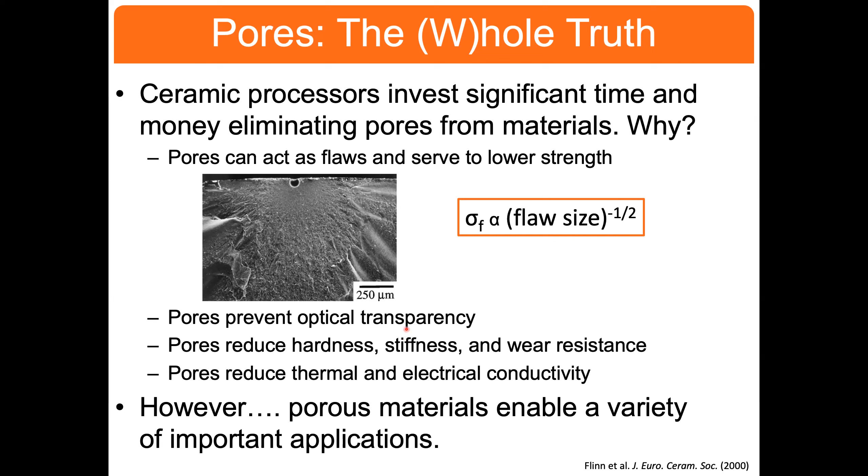However, as the field has advanced, we know that porous materials really enable a broad array of applications. To give you a sense of that, porous solids are absolutely essential in things like fuel cells and batteries, in catalyst supports—your catalytic converter, which seems to be a hot commodity these days, is made in a way where you have these flow-through channels, and those support the catalysts that are needed for keeping some of the nasty substances out of the environment. They can be used for bone scaffolds and microfiltration, and of course in thermal management, where that low thermal conductivity is then used to an advantage.

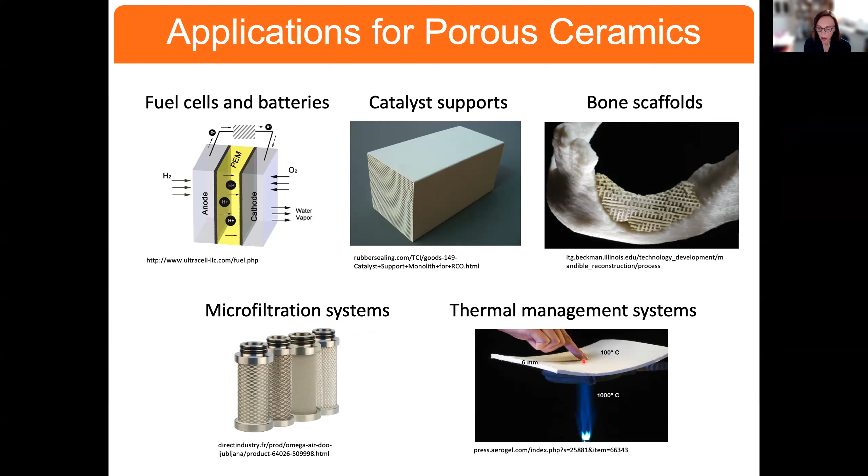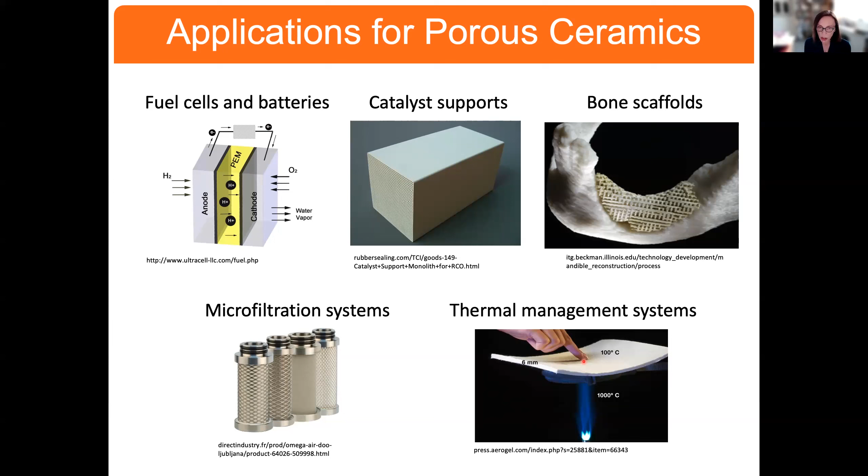So with that in mind, we need some sort of way to describe these pore networks, because as you saw in this previous slide, these pore arrays can have a variety of shapes and sizes. It's not just how much porosity is there, shown here in terms of fraction, but we also need to think about pores in terms of their size distribution, their surface area, their tortuosity in a specific application in which the pore pathway can be quite rough.

In fact, we can get a measure of that: the degree of order in the pores. You saw in the catalytic converter that the pores are highly ordered, whereas in an application for bone scaffolds, they needn't be as well ordered. We're also interested in connectivity of the materials, which you see here in this three-dimensional image, where the green shows continuous porosity.

So all of this then comes into play in terms of how we process these materials, and that will be a lot of the focus of my presentation today.

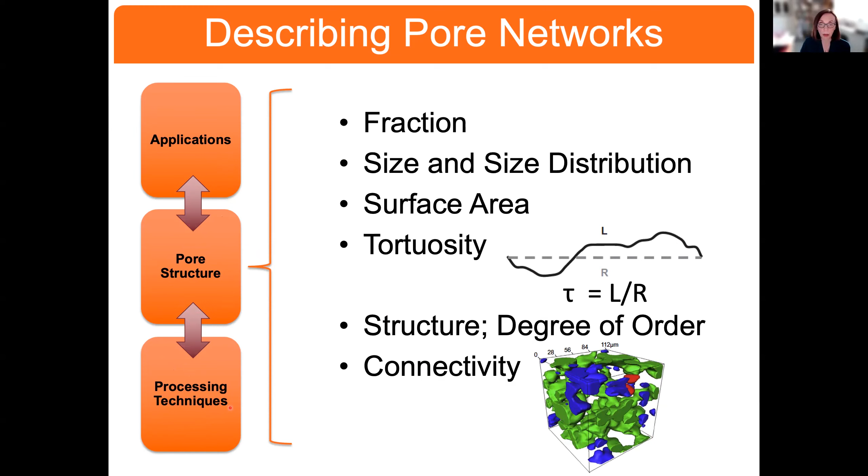Just to give you a sense of some of the things I've worked on, it turns out I've worked on a variety of porous solids. Some have to do with wood-derived materials where we can convert them to silicon carbide or carbon, and we end up with microstructures that look like this. They're known as biomorphic solids because we replicate what might be seen in a wood-based material.

Working with some industrial partners, we've looked at acicular mullite, and you see these beautiful needle-like structures that can be produced to look almost like pickup sticks. And of course, with the advent of additive manufacturing, we can also create porous structures as seen here in a very ordered array.

My focus today is going to be on these materials shown here in the bottom center. These are known as freeze cast solids, produced by forming a template and then removing the template. This specific one is produced to form a silicon oxycarbide.

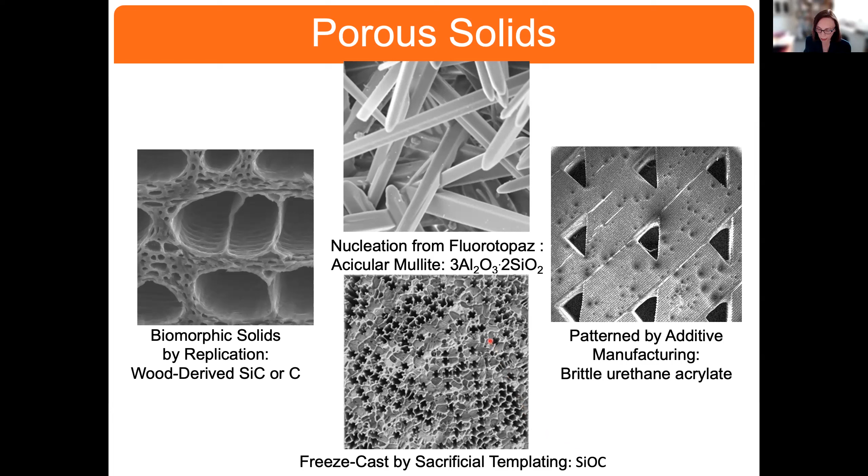So the two themes I want to focus on today are, first, how can pore networks be tuned to control flow and filtration in the body? And secondly, how can pore networks be tuned to favor deformation of a material over fracture?

So let's start. This tunability, as I mentioned, is a critical feature. The process we have used is known as freeze casting, and we're relying a lot upon an understanding of the solidification process.

I have to admit that in the ceramic community, we don't think a lot about solidification, in part because many of these materials are so high in terms of their melting points that we try to make them without going through a melting and solidification process. Instead, we do a lot of solid state processing. But in this particular case, we had to learn about solidification.

What I show here in this pressure temperature diagram is really a map which describes the solidification process. So we can do this in one of two ways.

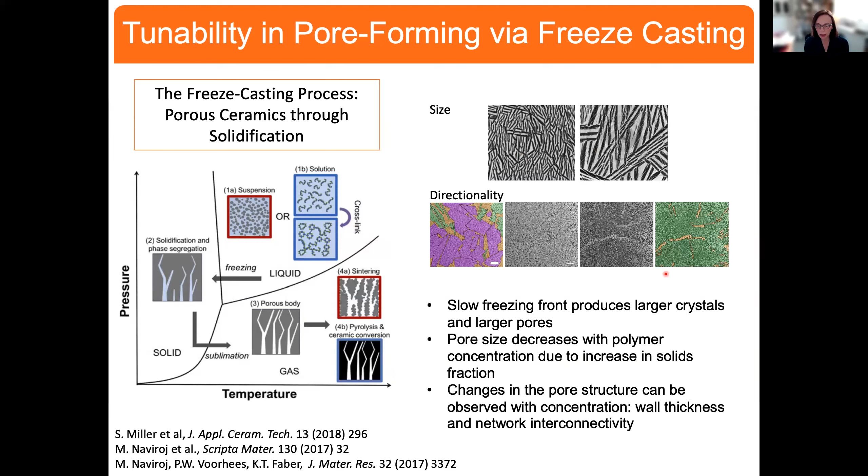Okay, so let's now go a step further. What else can we control? At the start, I mentioned all the things we wanted to control - not just size and fraction, but connectivity, etc. So to think about that, first I want to tell you a little bit about this.

Pre-ceramic polymer system that we use. Paolo Colombo has done extensive work on pre-ceramic polymers, and he and a couple of colleagues wrote a very beautiful paper that describes a great deal of work on these pre-ceramic polymers.

This figure in the middle demonstrates the various pre-ceramic polymers, ranging from polysiloxanes to polycarbosilanes, that allow you to make a lot of silicon-based ceramics - ranging from ceramics that include silicon, aluminum, and boron, just by virtue of the pre-ceramic polymer used. We focus our work on the polysiloxane, because when the pre-ceramic polymer converts to a ceramic, there's a pretty high yield, which is to our benefit, okay?

So this scheme enables a wide variety of techniques and materials. I mentioned that these are cross-linked - that step occurs in the solution step, and you can do that either using temperature or via a catalyst, as we often do.

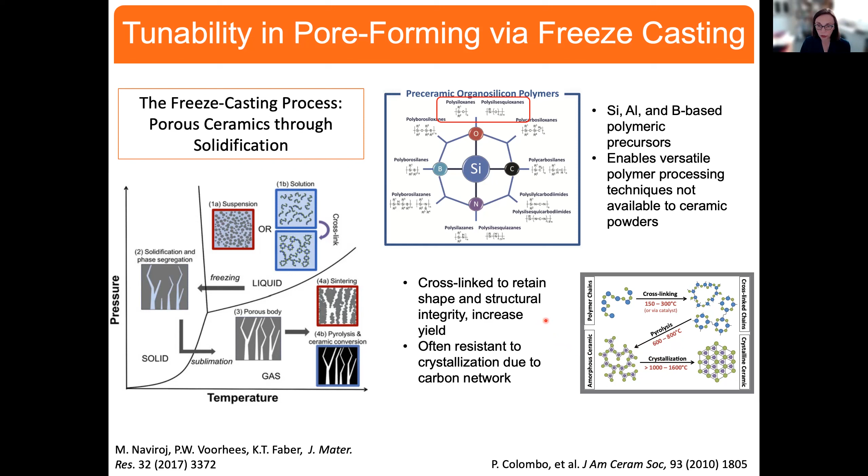Okay, so let's now think about the tools we have in hand to give us a greater sense of tunability. What I'm going to focus on in terms of these tunability methods is, first of all, the choice of solvent that we use for this solution step.

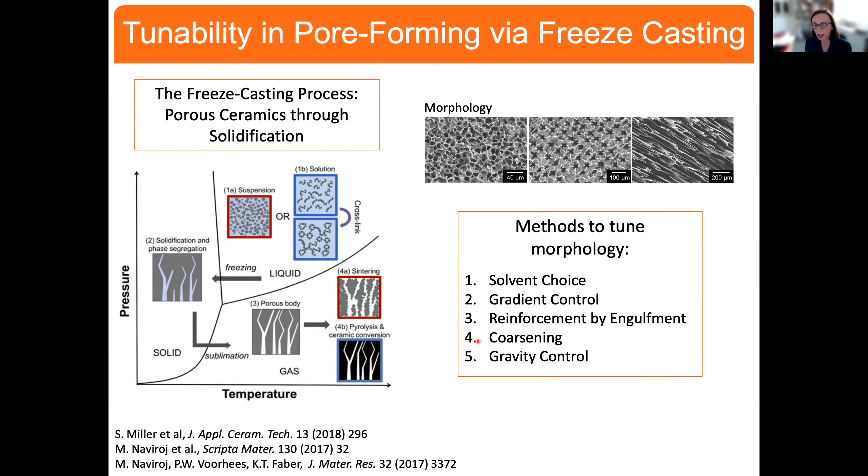I'm also going to show you that we can control the temperature gradient in the freezing process. The other method I'll focus on today is coarsening the structure, and in doing so, changing the morphology. I don't have time to talk about all five here, but we'll pay attention to 1, 2, and 4.

One of the things to think about in terms of the freezing process itself has to do with how fast a freezing front is moving through the solid, and also the temperature gradient we have imposed. What is the temperature of that cold plate versus that at the top of the solid?

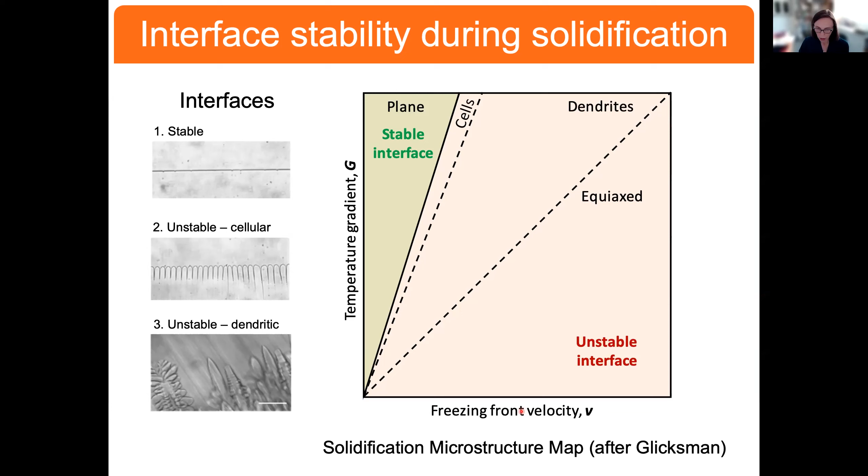So basically, if we can follow this map, if we have control over freezing front velocity and temperature gradient, we can move microstructurally through this map. If you go too far, you just get an equiaxed structure. So that's one important feature of all of this, that these parameters are at your disposal to control the shapes, the morphology of these pores.

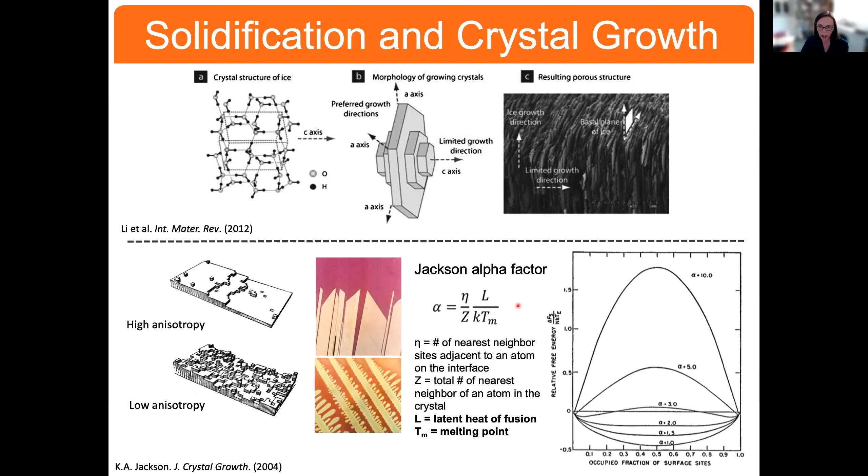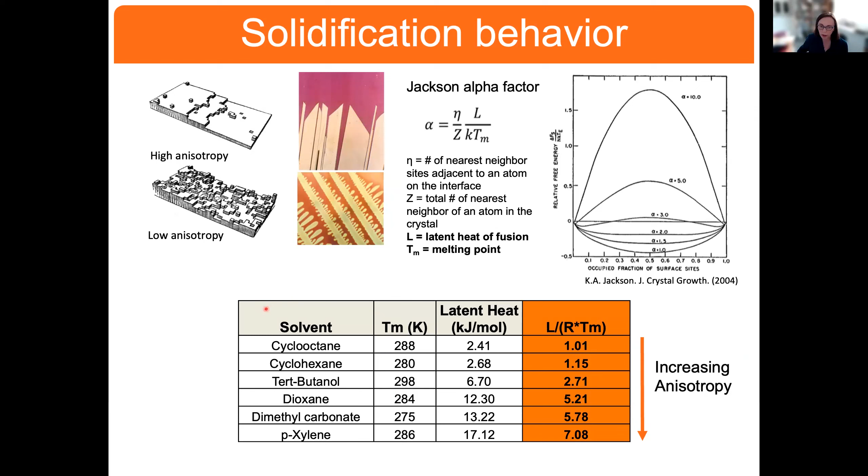So what we should expect to see is increasing anisotropy. Keep in mind, we're starting with the same pre-ceramic polymer, our polysiloxanes, so in the end we'll get silicon oxycarbide, but made with these very different solvents. So what one sees now is this range of pore morphology going from left to right.

Cyclooctane was basically the solvent that should show the least anisotropy, and in fact it does. These micrographs are a view looking top down - we've made a cut in the material and we're looking at the solid in cross-section. The bottom set of micrographs show the view if we cut along the length of the material. With cyclooctane, the microstructure looks like a sponge - it doesn't matter which direction you are casting in.

It is completely isotropic. But as we move through this increasing Jackson alpha factor, we begin to see a great deal of difference in morphology. For example, with cyclohexane, looking down from the top, the dark areas are the pores, and they almost look like crosses. In the longitudinal view, we see these dendritic pores have long channels - what you're seeing are the negative of the side arms of the dendrite. So all of these pores are outgrowths from the main channel of the dendrite, and they're negative.

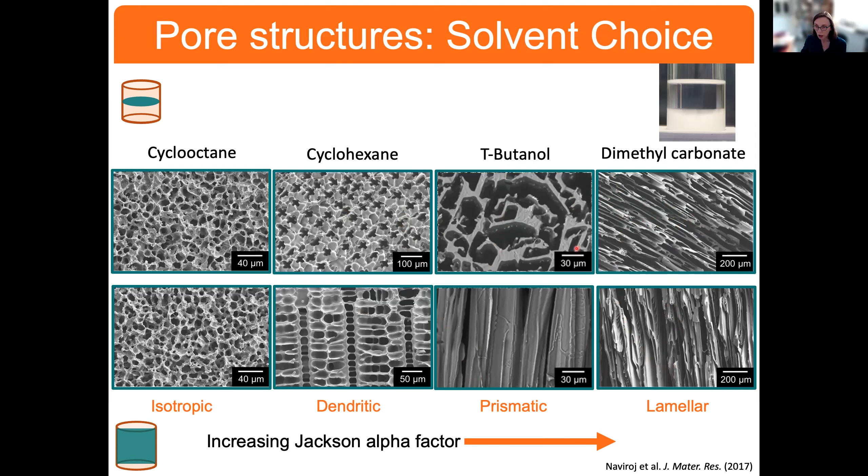Although I've been warned by metallurgists who think about solidification much more carefully than I that this Jackson alpha factor is not as accurate as they would like, it certainly has given us clues in terms of the anisotropy, or lack thereof, in these freeze cast solids.

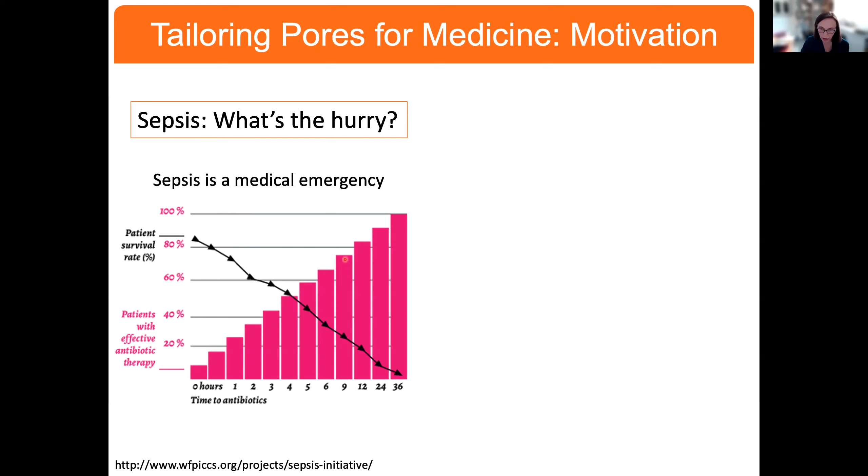But the problem is, in terms of how sepsis is analyzed, it often takes a blood culture to do that, and that blood culture can take more than 18 hours to grow and assess. So time, as you see here on the left, is of the essence. If you have to wait for a culture, normally you are treated with multiple antibiotics because they don't know what bacteria they're looking for. But it would be much more effective to be able to define which bacteria it is and treat that specifically.

Now the other challenge is that if you were to look in the bloodstream, the bacteria that could cause this illness is there at very small amounts. This is actually a zeptomolar concentration compared to what we see in the bloodstream.

Red blood cells, 5 billion per milliliter. White blood cells, 7 million per milliliter. Platelets, 200 million. So these are very small in contrast, and what one would like to do is not only separate the bacteria, but separate them in a way where we can have a large enough concentration that they can be analyzed easily.

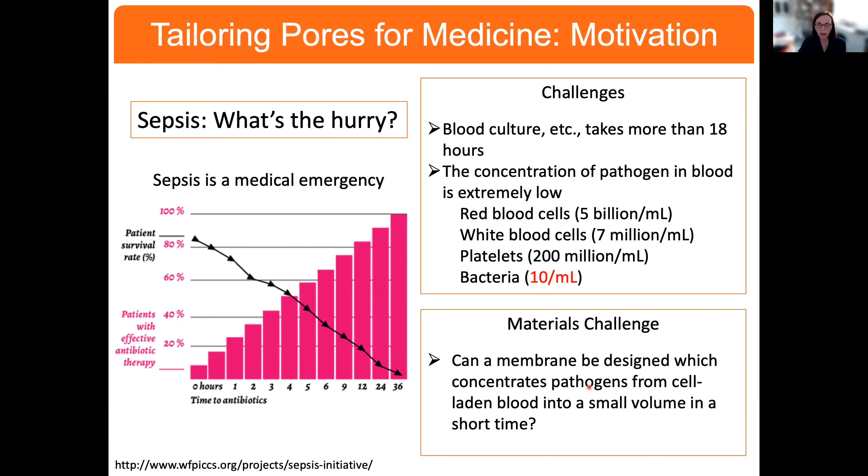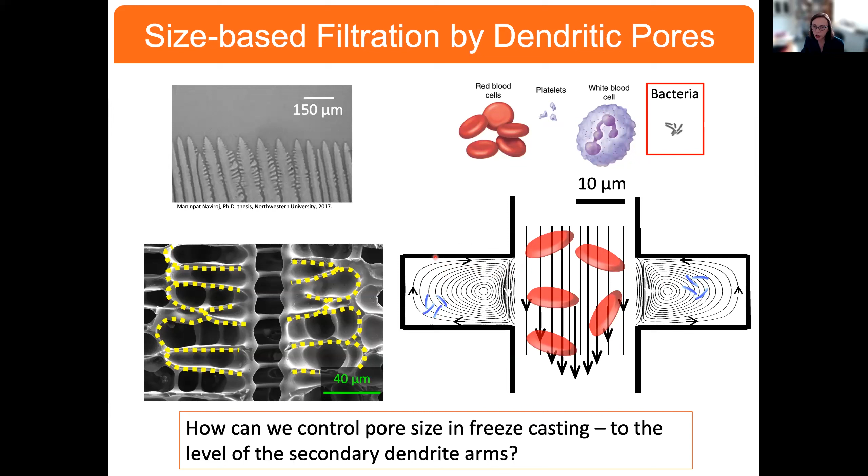So in terms of dendrites, this is the primary channel of the dendrite, and these are the secondary arms. As you might expect, in terms of tuning this whole process to produce a structure that we would want, we might want to change the length, or we might want to change the fraction of these arms.

And to do that, we go back to our stability microstructure map that I showed you earlier, to think about how we need to be in a regime where we have dendritic structures, and what comes into play.

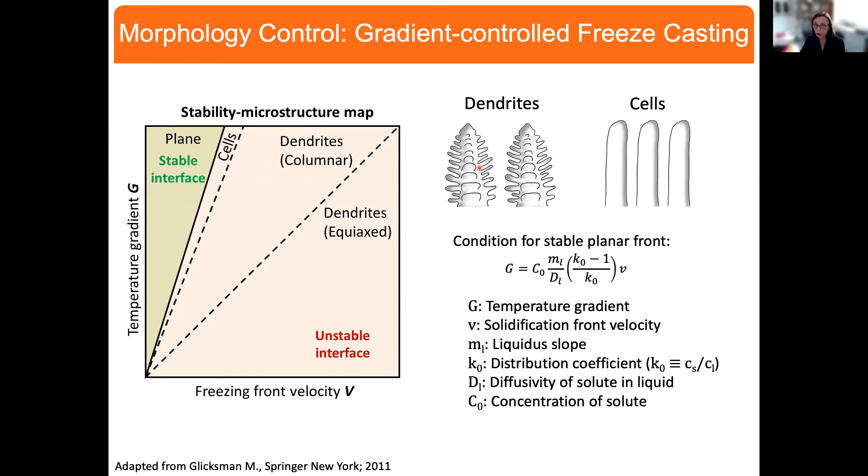I show here an equation that defines the condition for a stable planar front, over here. I do this to give you a sense, from a solidification standpoint, of what's going to play a role. Certainly the temperature gradient, that temperature difference between the cold plate and the exterior. How fast things move, we see the velocity plays a role here, the freezing front velocity. But then there are other features, in terms of the diffusivity of the solute in the liquid, the concentration of the solute, that also plays a role in the system, and that would allow you to move from this stable interface to a cellular interface to a dendritic interface.

So if we need to control both freezing front velocity and temperature gradient, one way to do this is not to just have a cold plate. This is an actual photograph of our freeze casting setup. So here's our cold plate on the bottom, here's the mold.

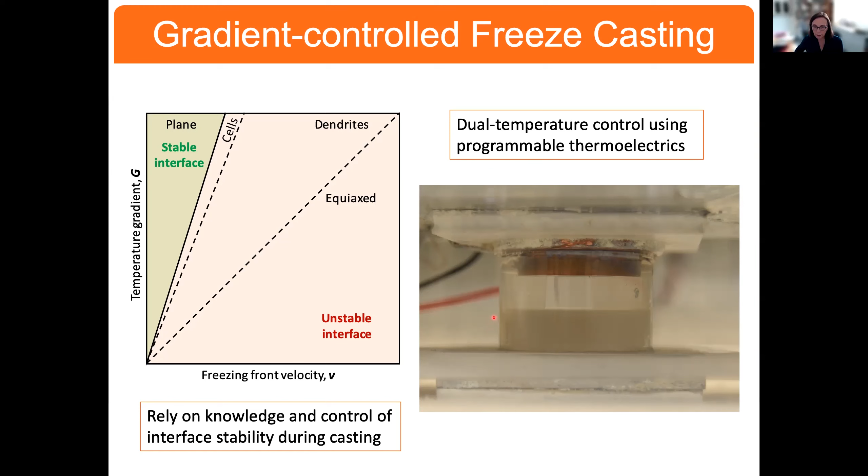But we also put a second thermoelectric here on the top. And that allows us to have dual temperature control, in which we can program to keep both the temperature gradient and also the freezing front velocity constant. It also gives us an opportunity to move around this region.

So again, what I've shown over here is this stability microstructure map, and I've put in a few points here. We can do some experiments where we can keep the freezing front velocity constant and change the temperature gradient, or keep the temperature gradient constant and alter the freezing front velocity.

And I want to show you both with scanning electron microscopy, but also with mercury intrusion porosimetry, which gives us a sense of the pore size distribution, where we're infiltrating mercury into the solid, and the pressure that we need to push this into the solid is going to depend upon the size of the pores. So if we know that pressure variation during the experiment, we can get the whole pore size distribution.

So the experiments that I'm going to talk about use cyclohexane as the solvent. And as I said, we use polysiloxane, in this case polymethylsiloxane, as our pre-ceramic polymer. After it is pyrolyzed, we are left with silicon oxycarbide. And we looked at this with a few different concentrations.

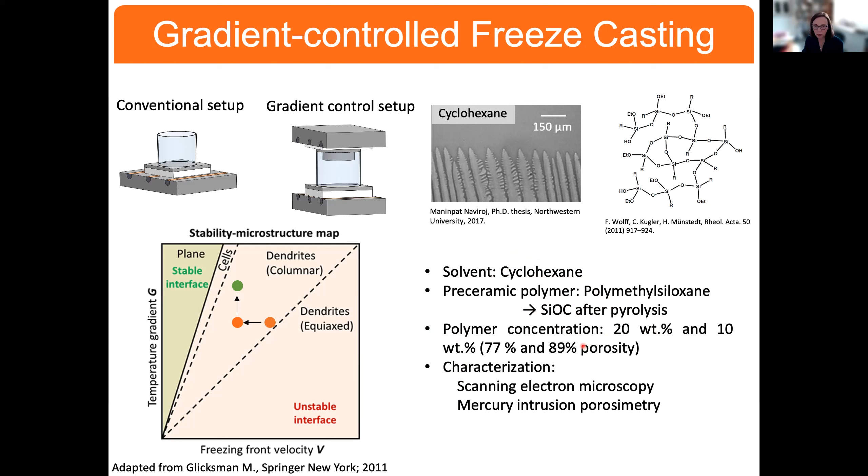Okay, so this is what we're doing. Here's our microstructure map again that shows us that if we start here and increase the temperature gradient, one of the things you see is that we have much smaller dendrite spacing. They're much closer together, so these are moving toward cellular-like pores.

If we start over here at a high freezing front velocity and decrease it, we end up, as shown earlier, with much larger pore diameters. Okay, so these are the knobs that we have to turn.

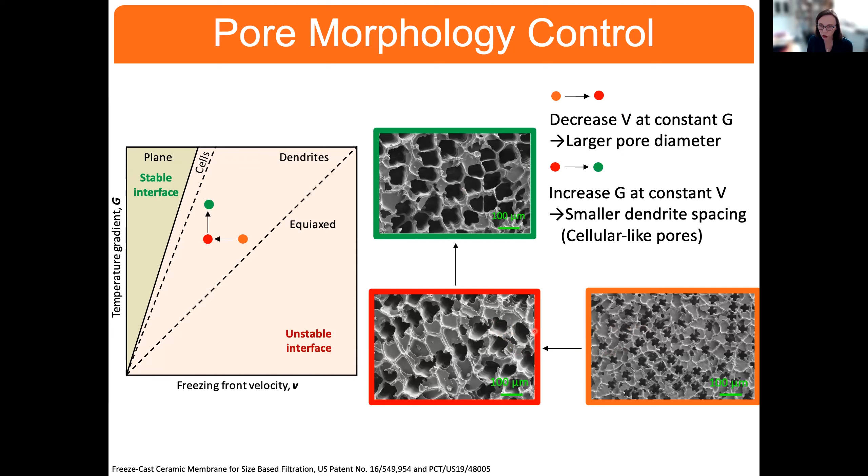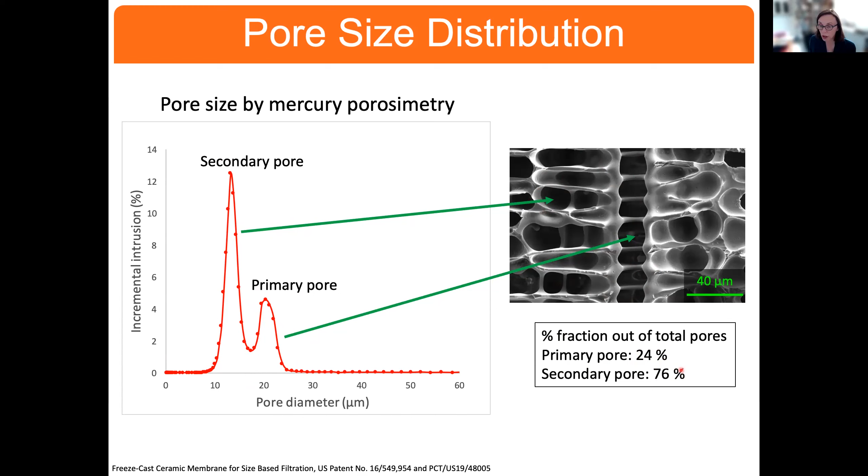And this is what one would typically see from an analysis by mercury porosimetry, in which we are plotting the percent intrusion of the mercury for a given pore diameter. We see here that at the larger scale, these are the primary pores, those primary channels, and these are the secondary pores, these side channels. You see from a fraction of pores that the secondary pores take up much more space in the material - it's 76% of the pores are the side arms, where 24% are the main channels.

And so this is an example now. If we then change the freezing front velocity, as we go to slower velocities, we're basically pushing that pore size distribution to the right to move that to much larger pores. And that's shown here in the longitudinal direction and in the transverse direction.

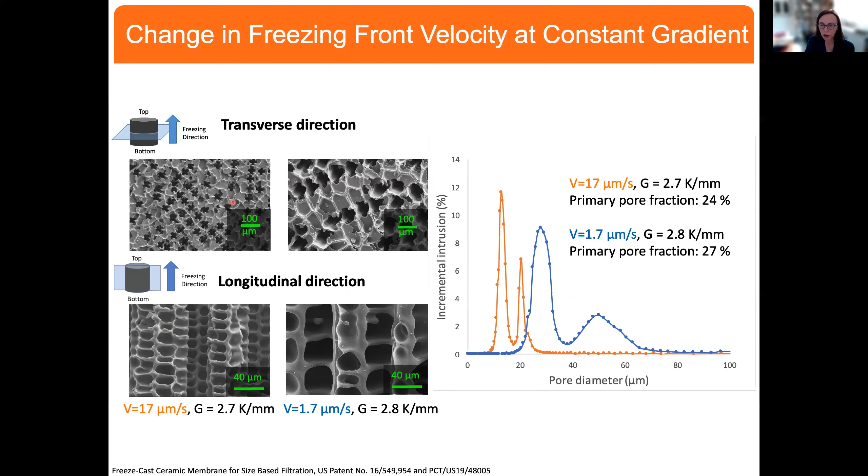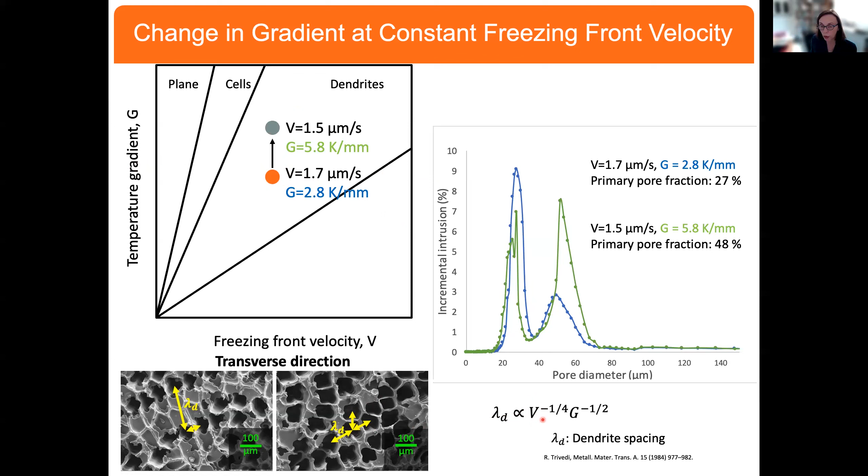And likewise, if I do this for constant freezing front velocity but alter the gradient, you'll notice we aren't changing size too much, but what we're changing is how much of the main channels we have with respect to the side channels shown here. And that dendritic spacing is a function of both those parameters, the velocity and the temperature gradient.

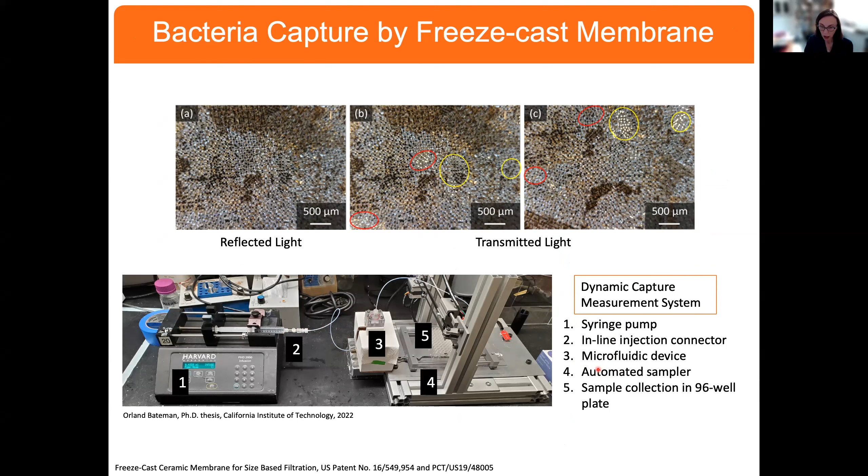So let's go quickly to these experiments. This is bacteria capture using a freeze cast membrane. Our colleagues in chemical engineering do this dynamic capture with this particular measurement system, in which we have a microfluidic device and an automated sampler that we can determine how much of the bacteria has actually moved through the system. And shown here again is a colorized version of the E. coli bacteria that we're picking up.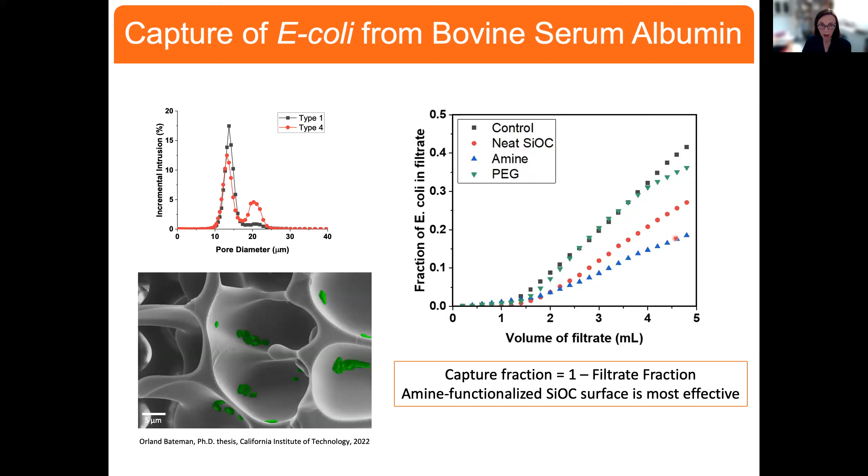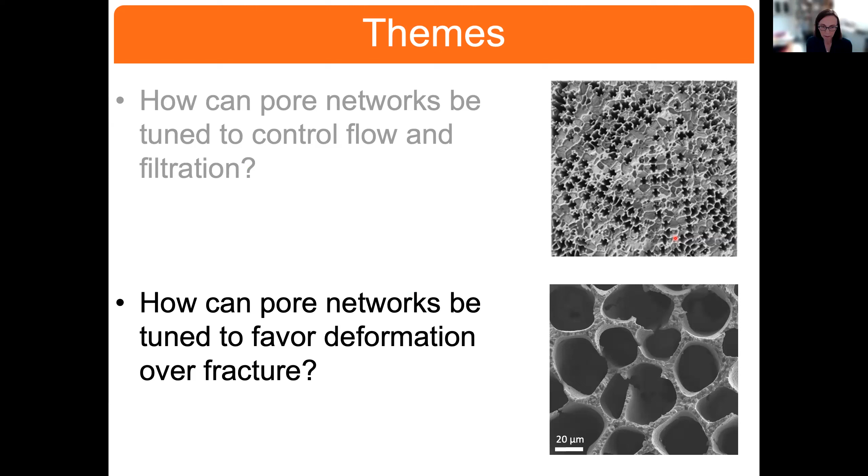Okay, I see that the clock has gone very quickly today. Let me move on now to a second theme that I want to talk about, and that is looking at materials that could be used in energy applications because of the fact that we can deform them in a way over fracture.

By imposing a stress on the material, we can convert that to monoclinic. The transformation is diffusionless, which means it can keep up with the stress - it's diffusionless, so it's going to be very fast. But it undergoes significant deformation.

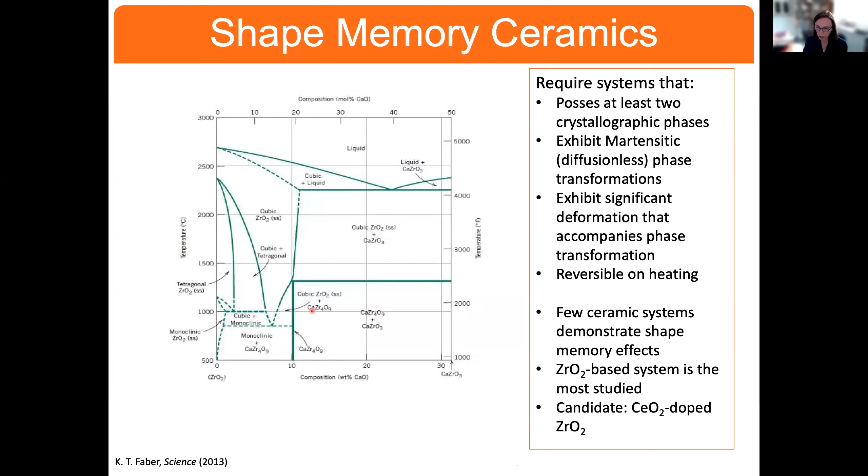And there are a few ceramics that demonstrate it, in particular zirconia-based materials. You can see this on this phase diagram of zirconia, and this is calcia. In this region, you see these various phases: tetragonal phase, monoclinic phase, over these temperature ranges. But it's important to know that these exhibit these martensitic transformations.

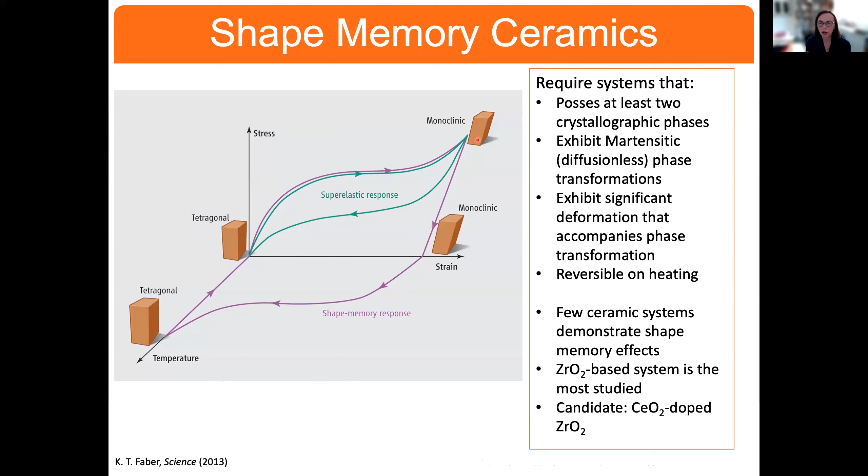There was work in the late 1980s that tried to produce these materials in bulk, but the problem was that the volume changes associated with this were so large that the materials would just crack as they went through these transformations. So the work was dropped.

It wasn't until the mid-2010s—2013, 2017—that people started making pillars of these materials to study them. The work done by Chris Schuh and collaborators in Singapore showed that these shape memory effects could undergo the austenitic to martensitic transformation; apply a load, heat it up, and it would be restored.

They showed this beautiful hysteresis in superelastic materials, and they even tried it with larger diameter pillars that had more grains—oligocrystalline pillars—and found that once the pillar diameter was much larger than the grain size, they would no longer see that reversible transformation behavior. Instead, it would just fail.

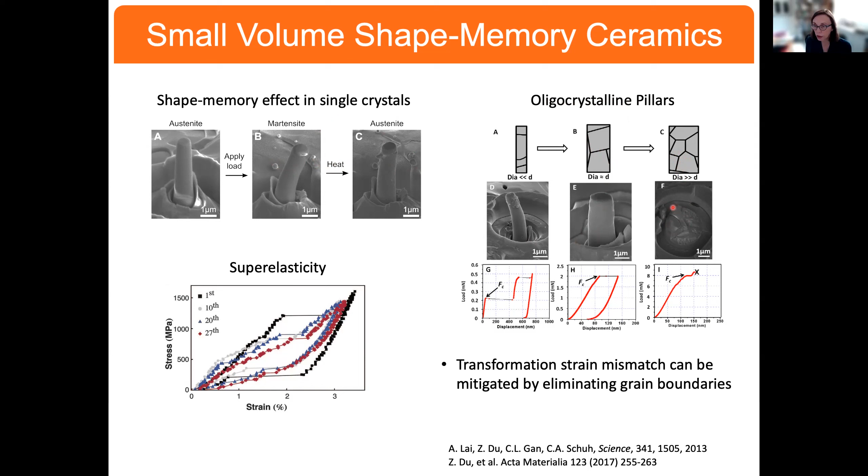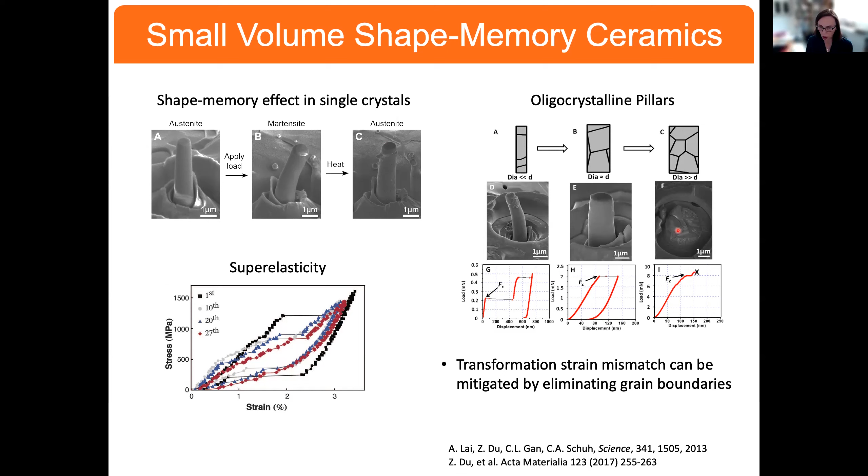So this gave us an idea: couldn't we produce bulk porous shape memory materials and make the pore walls small enough that we would have single grain pore walls? And so we did this.

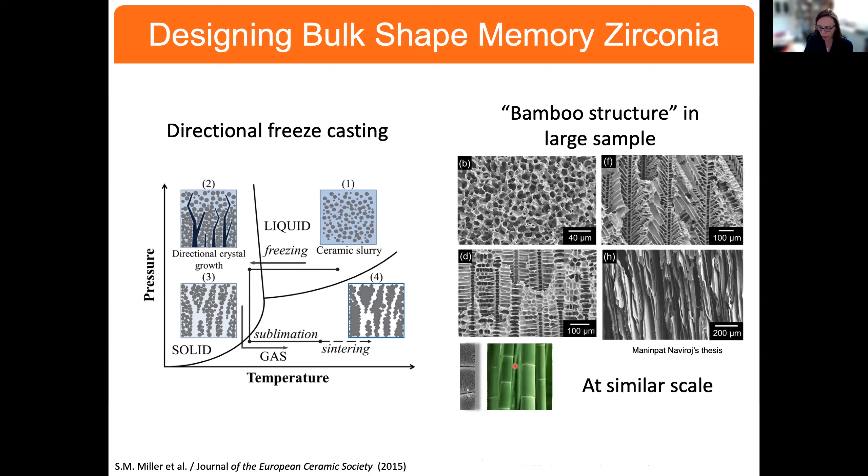Again, the idea is we did our directional freeze casting. Now we're looking at dendritic materials where we want to produce pore walls that almost look like bamboo structures, shown here in the bottom left. And again, we could do this in one of two ways.

We could take our microstructure map—temperature gradient, freezing front velocity, that I've shown you before—and work our way toward this cellular structure. You see these materials here as they go from highly dendritic to almost cellular.

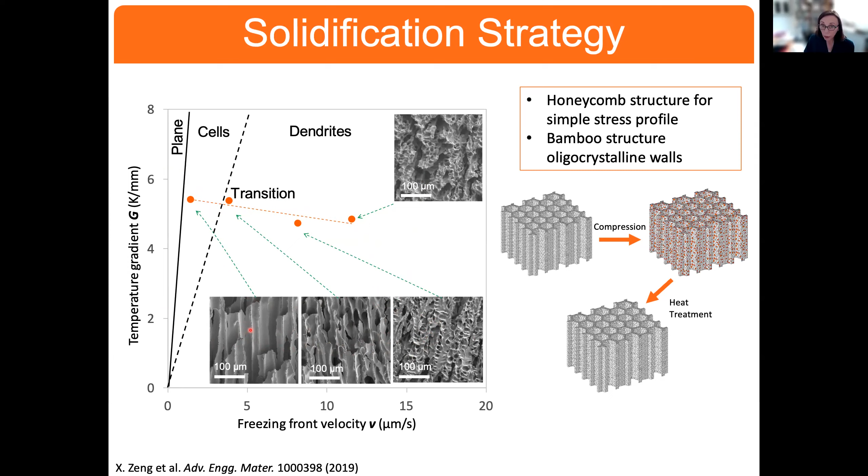There are other ways to do this as well, and that is to use coarsening. So we directionally solidify these materials, but then we sit them very close to the melting point of the solution. In doing so, we can get the cyclohexane to coarsen in a way that imposes that structure on the pre-ceramic polymer.

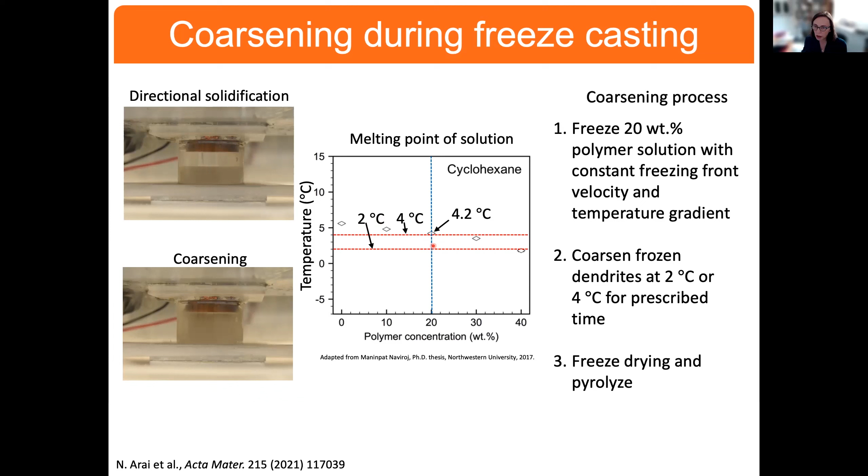Here's the coarsening process, where we freeze the material at constant freezing front velocity and temperature gradient. We've coarsened in this region and then would freeze dry and pyrolyze the material. Basically, we're moving from this highly dendritic structure to the porous structure, to the honeycomb-like structure with cellular pores.

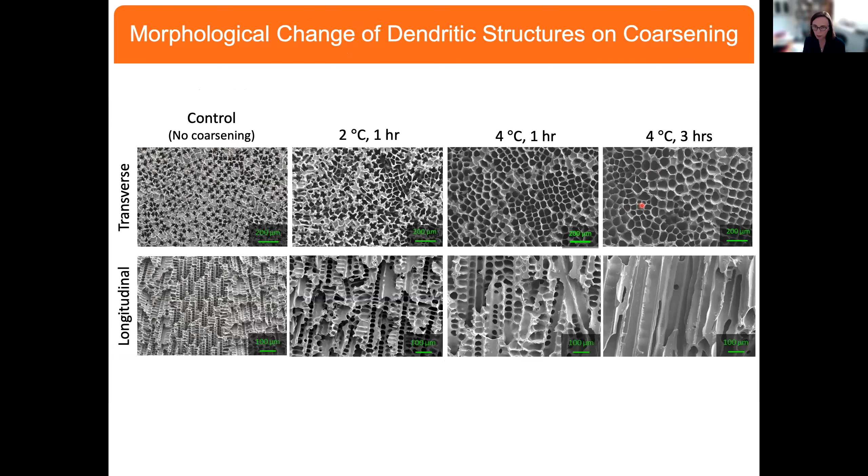We can also follow this with X-ray tomography, where in 3 dimensions we watch these porous structures evolve into these honeycomb and cellular type structures, where the dendrites result in honeycomb porous structures through coarsening.

This X-ray tomography technique allows us to follow this quantitatively and look at the mean curvature and how it changes, using this now as a second strategy to tailor the microstructures.

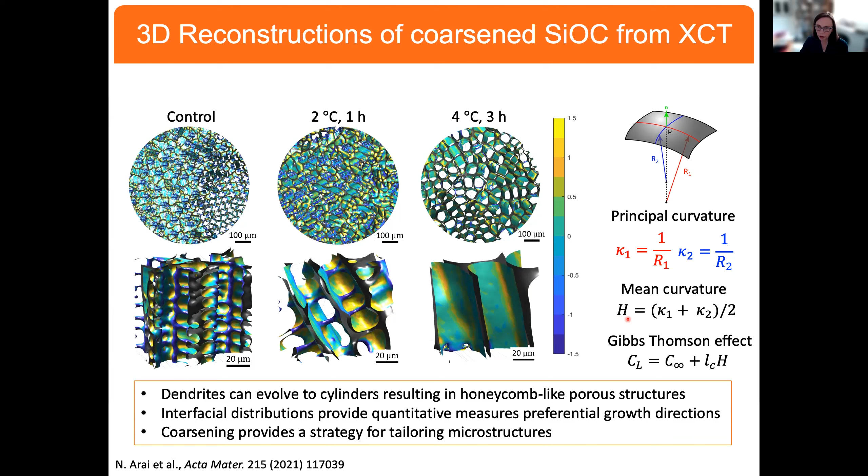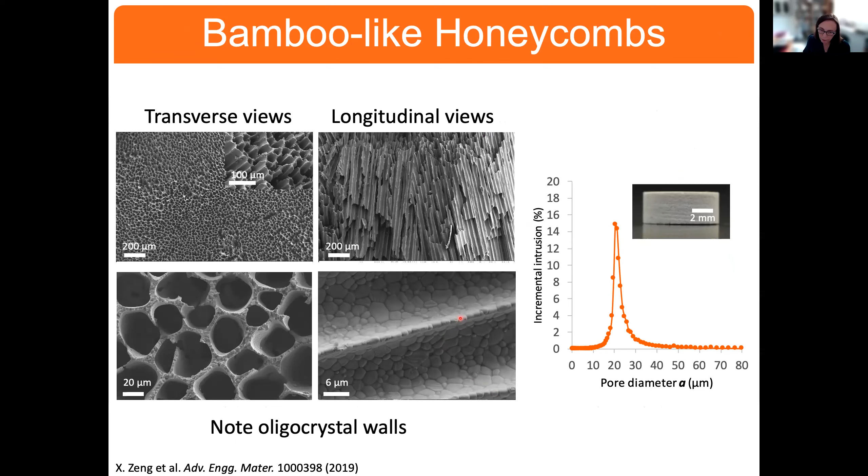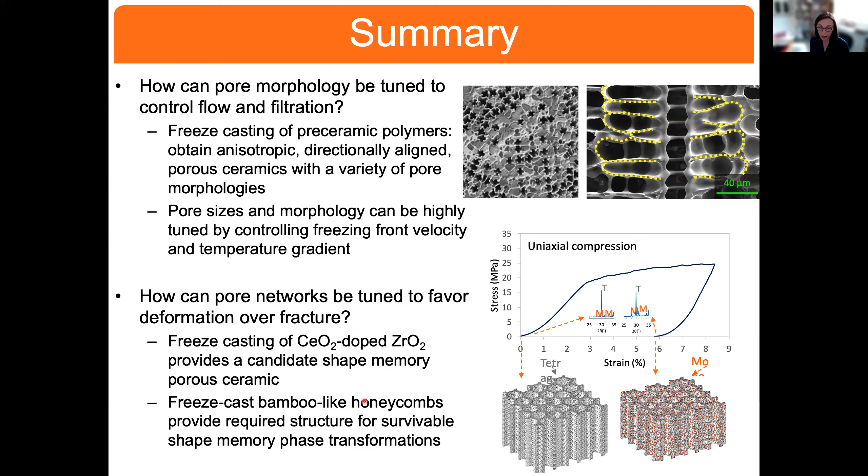Thank you very much, Katherine, for your beautiful talk and your gorgeous examples.